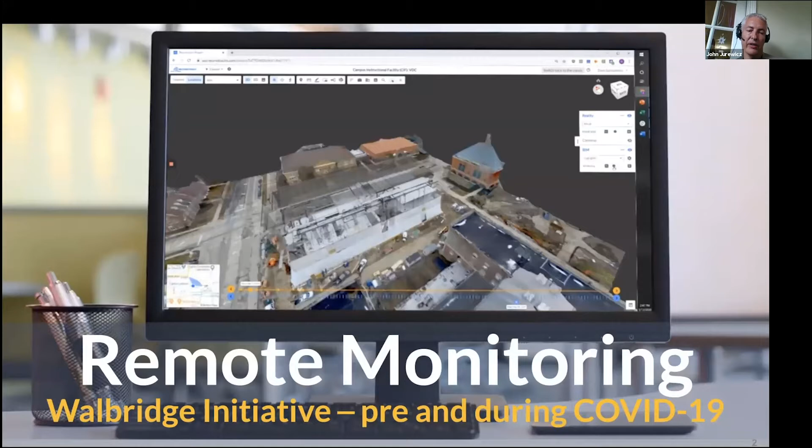John? Yeah, our problem kind of arose out of starting a group that had done laser scanning. So we were doing phase-based laser scanning, and we were turning the data around after registering in roughly a week to 2 weeks' time. And it just wasn't fast enough to be useful to the guys in the field. They also wanted to go forward and backward in time and see what had happened last time we shot versus what's coming at us and do this quicker, faster overlay with modeling. And we struggled in trying to do that with conventional tools.

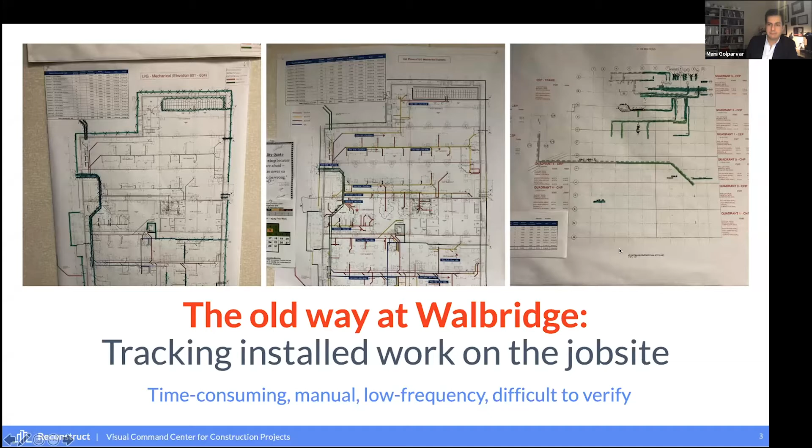Here we go. We can look at the next slide where this was our old way of working. And when I say old way, it was really just prior to learning the new overlay methods. In this case, we had two-dimensional drawings that were sliced out of a large model. And it was very complicated. We had a lot of error in documenting progress of work put in place, like pipe installation, and there were also discrepancies. We oftentimes were marking up systems that had yet to be installed incorrectly off of a 2D plan. So this was difficult for us and inconsistent.

The new way is much more precise and much faster. You've got an overlay of underground piping. You can see what it looked like before you backfilled. You can then overlay that with the new design and new systems that are coming. The sequencing is much more real, much more apparent, and again, that speed of looking at it and being able to review this on a tablet out in the field is just incredible. Very helpful.

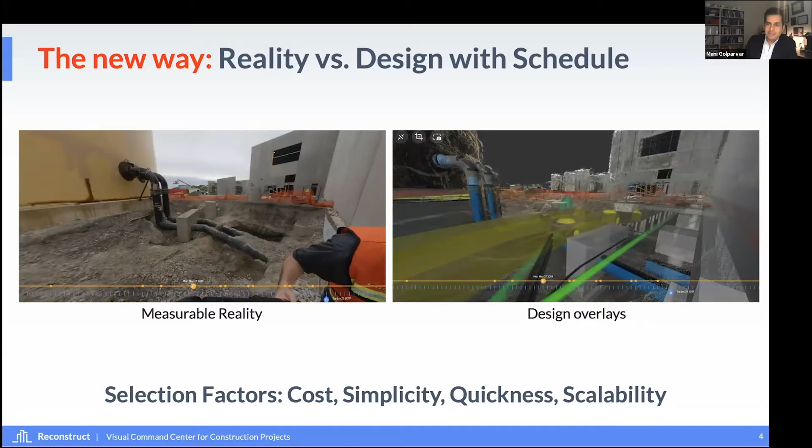I learned about this initiative that John had about remote monitoring almost 3 years ago, way before this pandemic happened. And this resonated with our own experience at Reconstruct pretty well. I used to work for a top 10 ENR construction company. In our projects, which used to be around 1,500 projects a year, we had 1 or 2 field engineers sitting in every trailer analyzing daily reports. When you open up these daily reports, you would see that there's not a whole lot of information really being captured on the job site.

But really the intent is to make sure subs, owner, contractors, everybody really understands how much work gets done. And it's part of our owner requirement, right? We have to submit weekly reports in terms of how much work gets done. We never trust this information, not only at the project level, but at the entire regional level. So what we do in every single project is we ask every contractor to stand up and color code 2D drawings for a construction management firm project, which is very similar to the projects that John was referring to. What we really wanted to do was to use this feedback to update our schedule.

But as that picture from one of the projects I actually used to work on myself shows, you can clearly see that the P6 schedule happens to be on this corner of the wall, and color coding and the feedback in terms of how much work gets done is being documented in a 2D drawing. So oftentimes people who were removed from the site were missing this feedback of how much work gets done in the job, so we can use that information to take control actions.

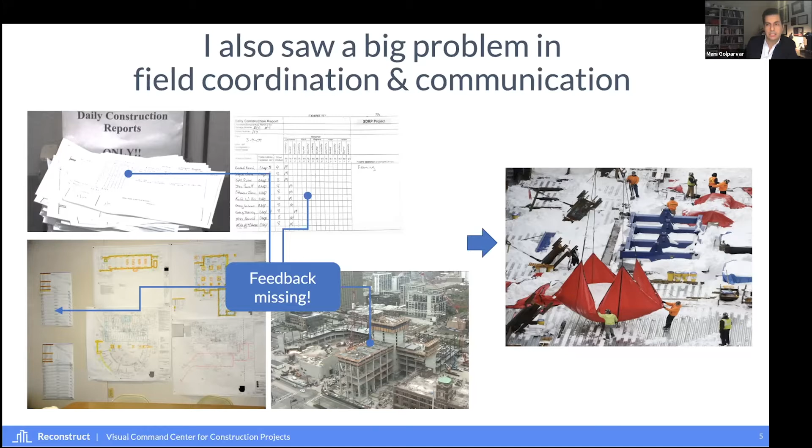This doesn't only apply to one company or two. This is at the entire industry level, where these issues with coordination and communication and what happens in the field and making sure all the stakeholders are on the same page are leading to cost overruns and project delays that we've seen ENR, Dodge, and McKinsey reporting on. The way we wanted to solve this problem was really to tap into the most simple form of communication.

If you talk to owners, if you talk to subs, every contractor who's on the job site, if you show them a picture, they would understand immediately what needs to be done and how much work has been done. Images and videos are really that single source of truth that we can use to communicate what needs to be done in the job, and even use that as a feedback to the schedule to make sure the basis of the schedule is being updated.

But there are all kinds of visual data. Sometimes we walk around and take pictures with cell phones. Sometimes we use professional photography services. Sometimes we rely on time-lapse photography. Application of video cameras indoors are extremely popular, especially with 360 cameras. For the past 5 years, we've seen a surge of drones in construction to the degree that now the construction industry is the #1 market for drones as a hardware platform. And as John pointed out, laser scanning.

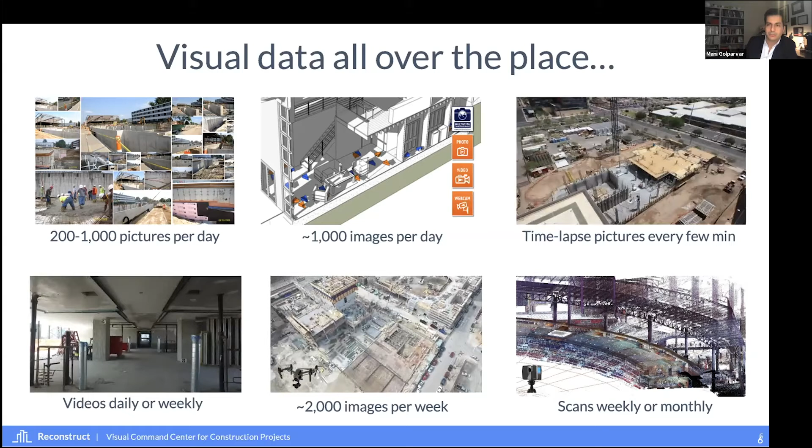We wanted to see if we can tap into all kinds of visual data, but as you can imagine, none of them were really organized in any form or shape, let alone providing that feedback that we desired to improve the basis of coordination and communication. So we brought this concept up to John. He actually shared with us a very similar story at Walbridge.

John? Yeah, we had spent time laser scanning, like you see in the upper left there, with a phase-based laser scanner. It was taking us time, and you had to register it. And also we often would get damages done to our scanners. I had the experience firsthand with having a scanner get knocked over in Mexico. And there's also the problem in a steam tunnel with fogging up. And so we had lots of different issues with expensive equipment.

And then with drones, it's difficult to fly indoors, and the battery life doesn't really last that long. And there's all kinds of permissions, and some clients just don't allow drones to be flown for other reasons, industrial espionage being one of them. So we were really attracted to this idea of just walking around with a handheld camera where you could really get into an issue quickly.

And we've perfected that. We have a users group where we work hard on these 360 images, trying to always improve the lighting and the way it's captured, and work closely with the Reconstruct staff to make sure we're really getting comprehensive captures going on. Thanks, John. As you can all see, there are all kinds of reality capture solutions, and there's really not one that would fit all job sites.

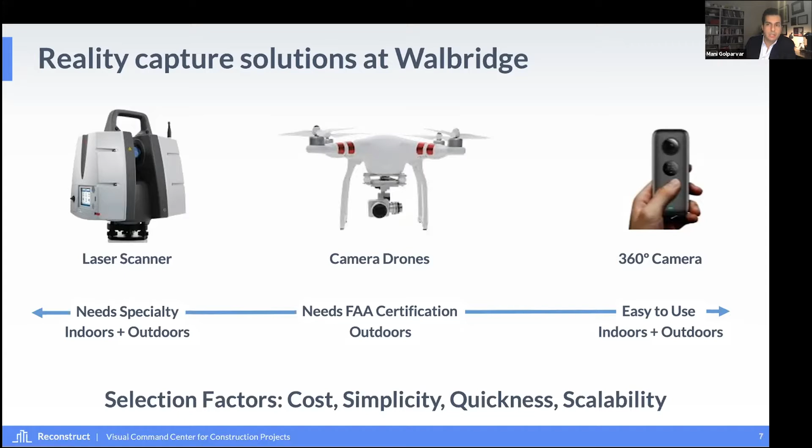So what we really wanted to do at Reconstruct is to offer a solution that is agnostic to hardware, and it can work with any type of device and make sure it brings that wealth of information as a feedback to the schedule. So with that, we've been offering a remote monitoring solution for almost 5 years now, where we integrate with a number of platforms from Aconex, BIM 360, Procore to bring existing project data into our platform.

What that means is your images and videos you're capturing with drones, 360, cell phone devices, through the photogrammetry engine that we have at Reconstruct, can automatically transform into a measurable street view experience. An experience that would give you that time machine for construction, that at any point in time, you can see what's happening, you can measure that, and use that for documentation and coordination.

The second aspect of our system, and the second workflow that we support, has to do with quality control. What that means is we bring in 62 different file formats of design, 2D or 3D, or the hybrid of the two. So now you can see what is there versus what should be there on the job site. And if you map that out in the context of a schedule, for which we have bidirectional integration with P6, Microsoft Project, or it can be as simple as an Excel spreadsheet that you can import into our system, you can see what is there versus what should be there in the context of a schedule.

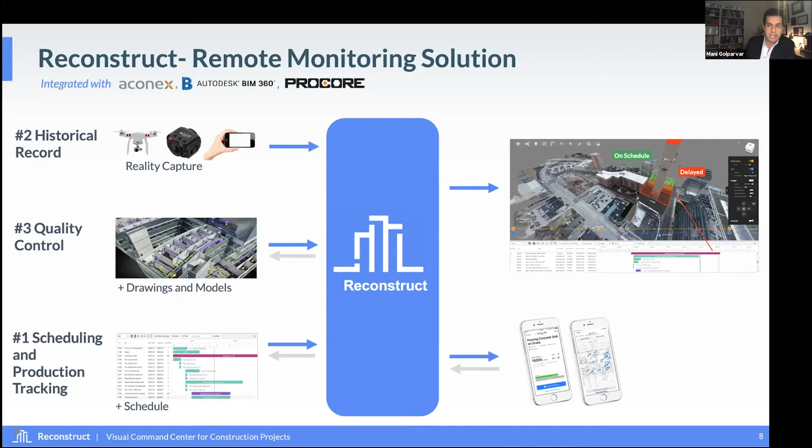This information is entirely web-based and accessible through mobile phones. What that means is if you are completely remote, you can log into the system and immediately see what are the locations, tasks, work packages that are on the schedule, and what are the things that are behind the schedule.

Our system learns the pattern of production on the job site, and as we contrast what is there versus what should be there, we can use that information to forecast the future. So we can always highlight indoors and outdoors what are the locations that are at risk for potential delays. So when teams are going to a coordination meeting, instead of reacting to what has happened over the past few weeks, they can plan ahead of time to head off potential delays from happening.

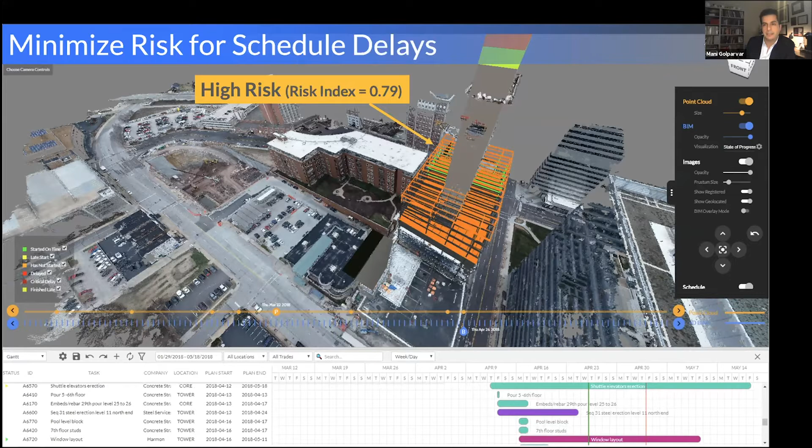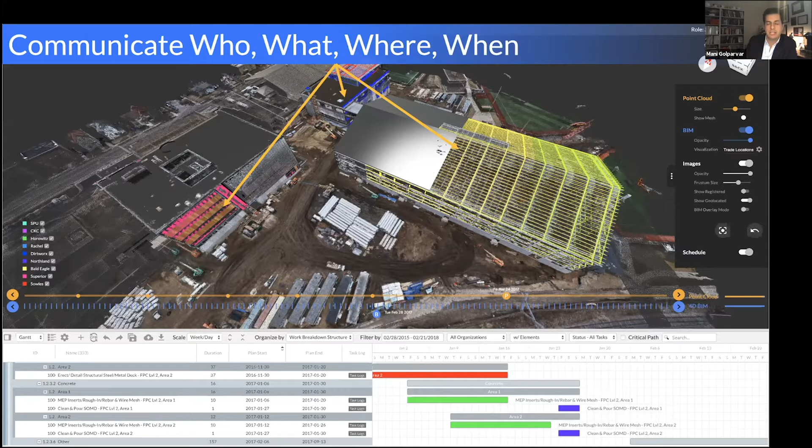And really the last visual is something we use every day on every job site, where we want to make sure that we can communicate who does what work in which location. We leverage the power of the models and the data behind them, tapping into the schedule so we can plan out the total quantity of work expected, all mapped into the context of what the photogrammetry engine provides us, which is the reality on the job site. So you can focus on coordinating and communicating with the most up-to-date information, whether that's reality data, design information, or schedule.

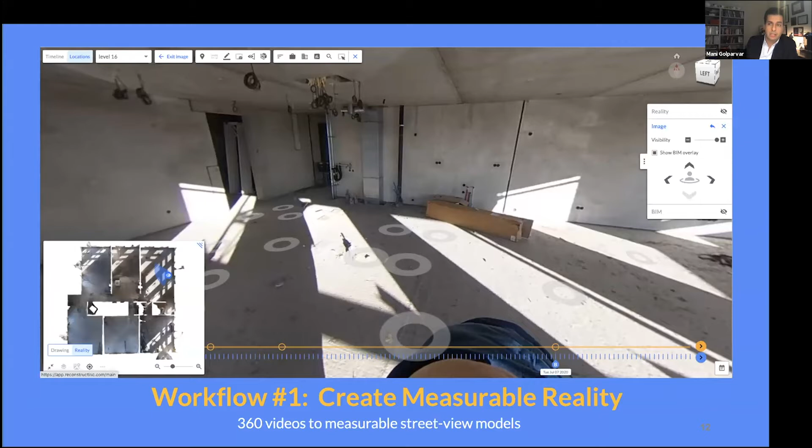So with that in mind, John and I are going to present three different workflows. The first is visual documentation, getting started by bringing in your images and videos and generating measurable street view experiences. We've shown examples of drones and laser scanning, and I'm sure many in the audience have seen those. So we felt like we could focus on what's been specific to the Walbridge initiative and one of the novelties we have at Reconstruct, which is tapping into 360 cameras.

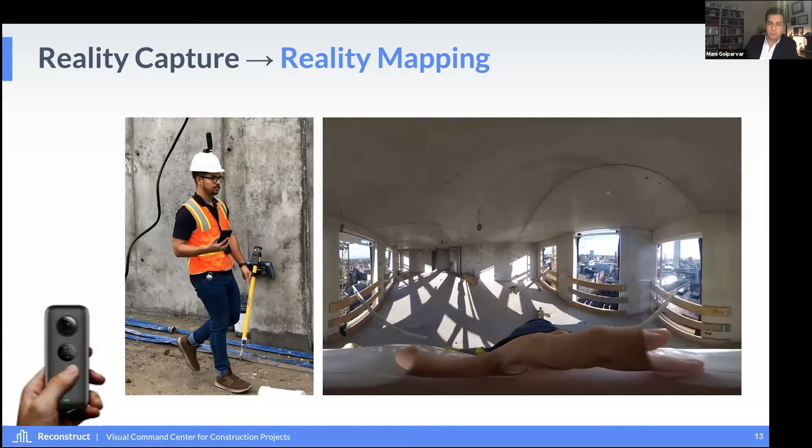These cameras are extremely popular, probably the number one modality of capture in Reconstruct. What that means is you can simply turn them on, put them into video capture mode, and just walk around your work location without doing anything else on your phone. Reconstruct can automatically transform these videos into measurable 3D models.

What you'd see is a picture extracted from a video frame, which is measurable with donuts on the ground that help you navigate to other frames of the video. On the lower left corner of the viewer, you'd also see a navigation map, a 2D floor plan, automatically generated from the video. Our engine, regardless of whether you've used Garmin, Insta, Ricoh, or any other 360 camera, can automatically give you this experience, because even from 360 videos we have the ability to generate point cloud models.

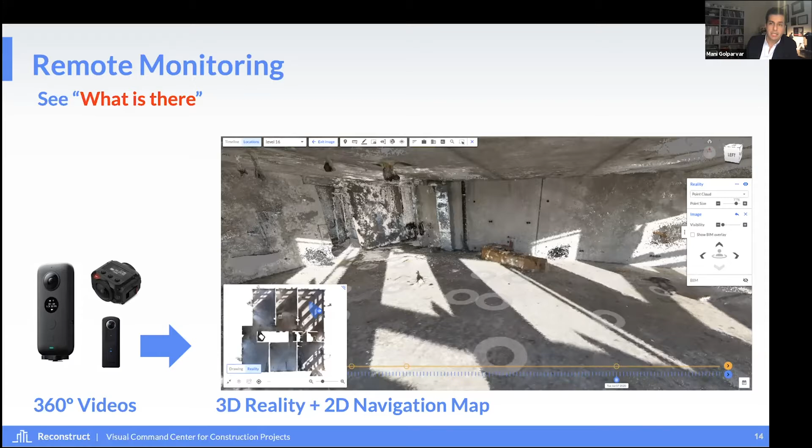And we do that over a project timeline. So as you create a reality capture, you can always contrast that against design, whether that's your IFC file, Navisworks file, Revit, or a federation of all of them. So you can contrast what is there versus what should be there.

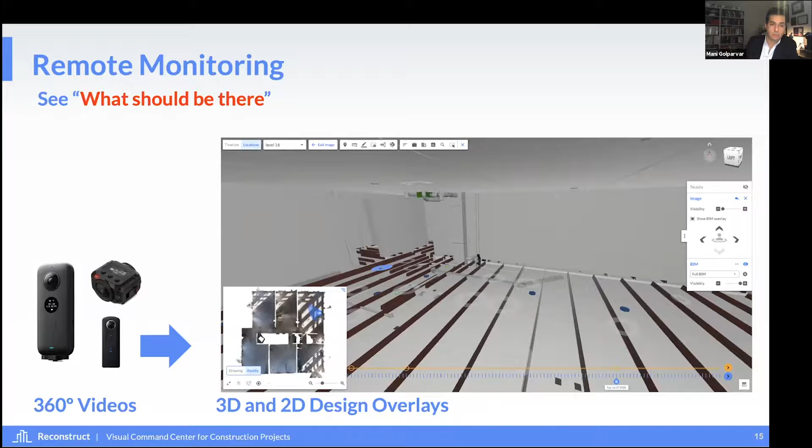Here's how that experience would look like. For every location, you'd be sitting at your home office, like many of us are doing right now, and we can log into the project level 16, and start clicking around on these donuts on the ground, going from one frame to the other.

As we make these transitions, you can clearly see this street view experience where in the back of the scene there's a point cloud. Every image you're looking at is measurable. That means now, indoors and outdoors, every frame gives you the ability to measure angles, distance, areas, volumes, and track them over time.

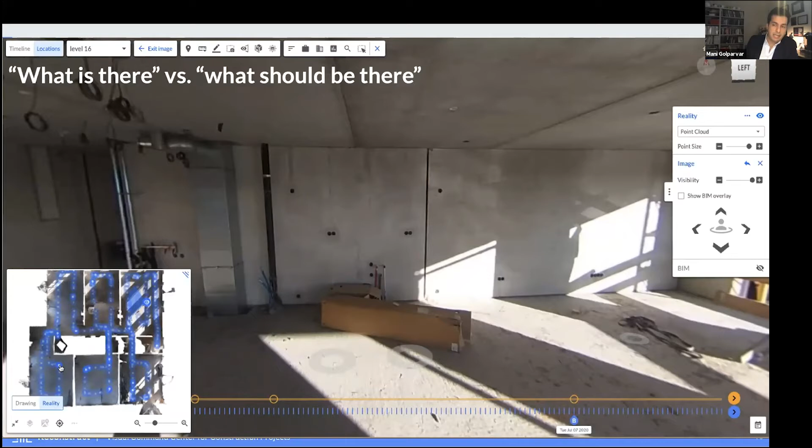This can be done with laser scanning point cloud you import, with drone data, or with the 360 video you see here. For the floor plan, you see the ortho photo that's automatically generated, and you can use that to guide where you are, or even download it for your tenant improvement or design needs.

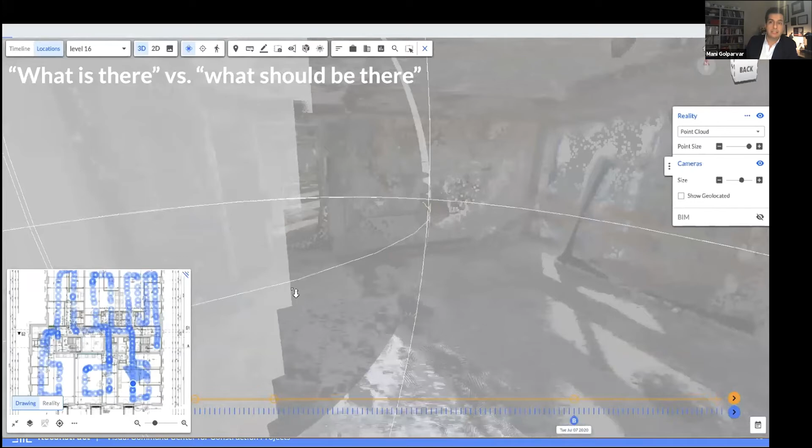You can clearly see the frames are mapped. If you bring in your 2D design information, you can also map the reality against that design, so your navigation can be done against a design floor plan, or switch back and forth between 2D and 3D. As much as everything I've shown you is 3D, there's a 2D aspect to the system, so you can run this entirely in 2D.

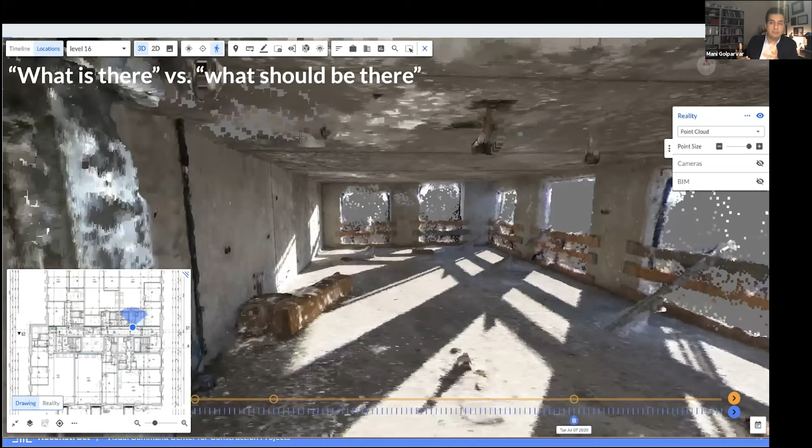Here, just showing you a quick walkthrough from the point cloud perspective, so you can see even from one video capture for a few minutes, there's a very compelling point cloud that can be generated. You can switch to a 2D viewer, where you can see the design information against the reality. This is also great because you can create your issues in 2D and make sure those who want to interact with the system from a 3D perspective can go back and forth and see what really happens.

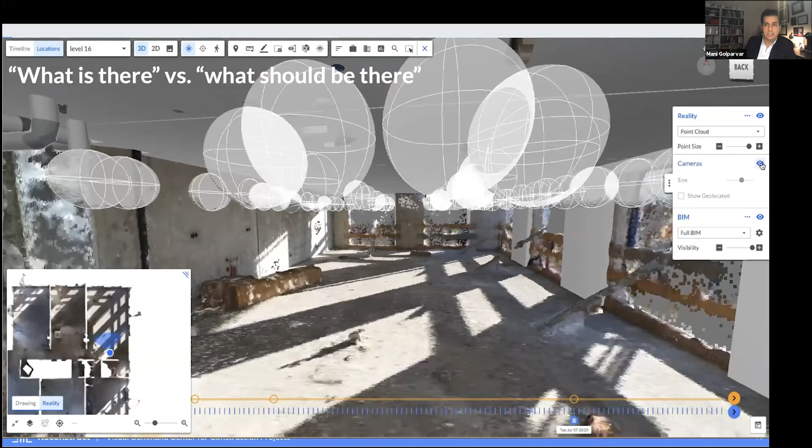Everything in this system is organized around location, so you can go from one location at a time, or go back and forth and do this sort of time machine for construction. Design information can be overlaid on top in 3D or 2D. I showed you the 2D a moment ago. Now we are heading back to one of our images.

If you go to the image, you can immediately interact with it, measure it, or do a BIM overlay on top as opposed to side by side. What that means is you can exactly see what is there versus what should be there.

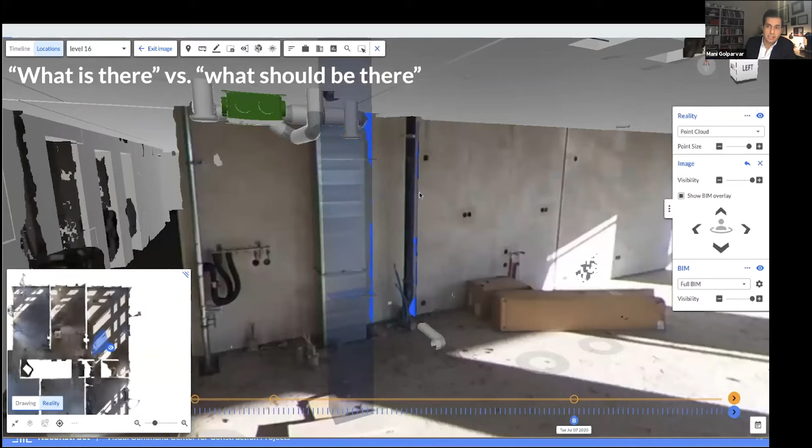The system is entirely interactive, so you can extract, focus, and isolate components, get access to metadata that you've provided in the design, so it immediately becomes useful for quality control. That means you can hide and play with the transparency in a form of augmented reality, and now measure the delta between design and reality.

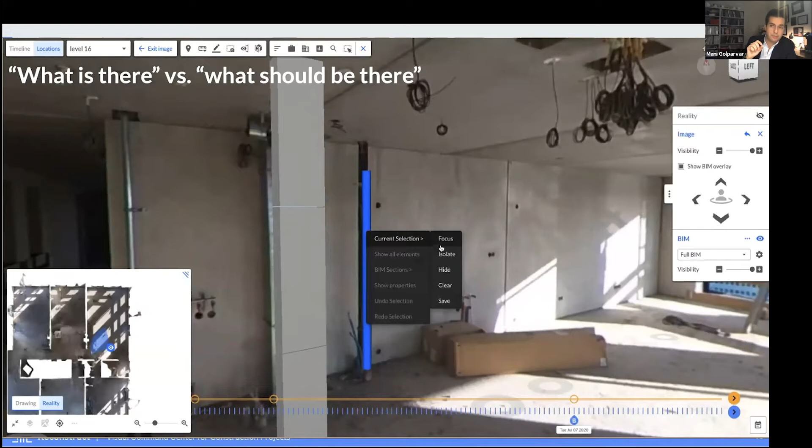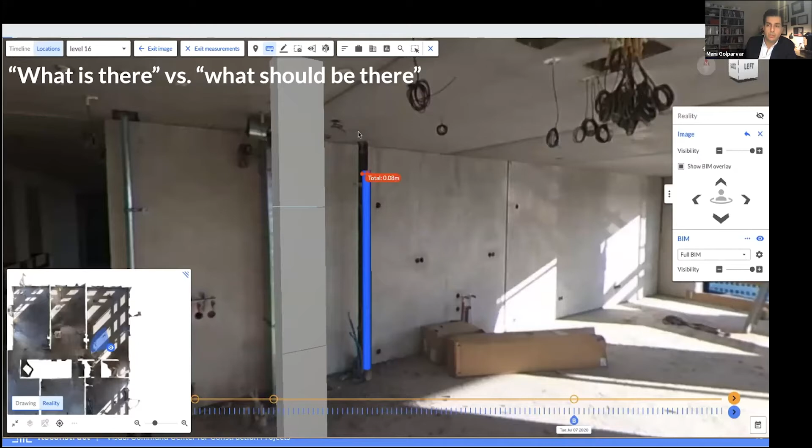In a moment, I'm going to pull up my measurement tool here after showing you the properties panel, and we can find the delta you see between design and reality. Our measurement is enabled both from a design perspective and also from a reality perspective. Obviously this can be documented as an issue, or sent as a text message to anyone in the field so they can immediately address the issue at hand.

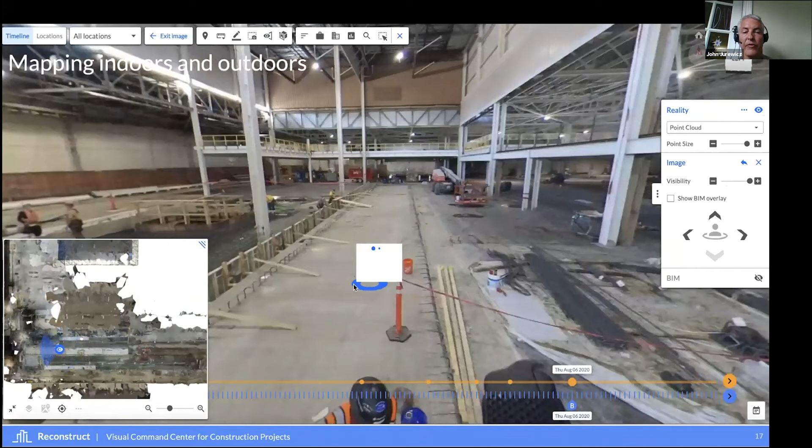So with that in mind, we started deploying this with John, and this is one of John's projects. John: Yeah, this is a current factory where we're trying to make America great again by gutting a building and converting this into an electrification truck facility.

Here we had to raise the roof, renovate existing structure, and a lot of the old design drawings didn't really match what was out in the field in terms of bracing and connections. So some of the features that Mani just showed you became really important to us, testing this out in the field.

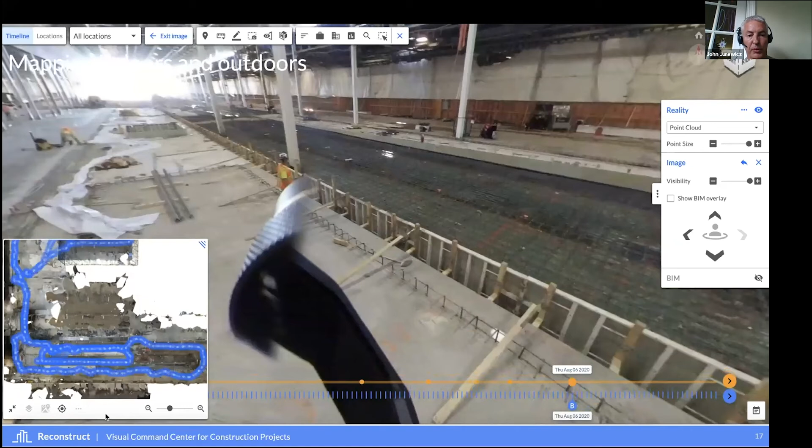And looking at column connections to bridge girts, moment resisting connections, also documentation prior to slab pour, so we could see where the rebar was placed and how dense it would be if we're going to core at a later date. All these things became much more useful to us, because we could measure forward and back in time.

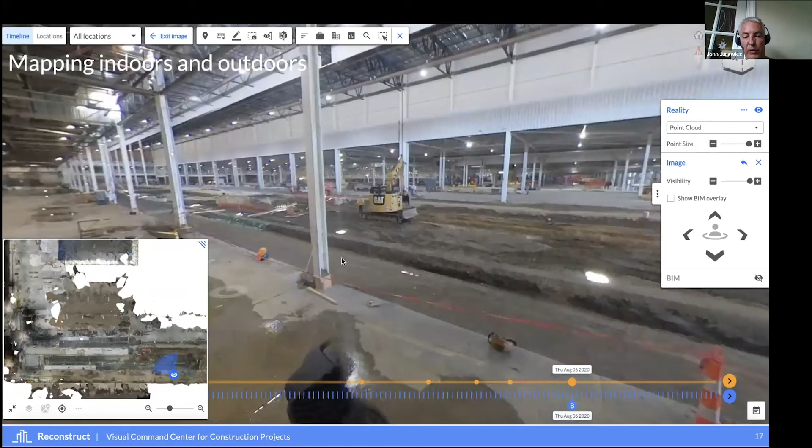So a superintendent who showed up midway through the project could come on here, and one of the first things he did was look prior to the slab pour to see how densely the rebar was placed, to see if we could core these slabs in the future.

So it becomes really useful in photogrammetry to be able to go forward and backward in time. I wanted to also show you an example of drone imagery where we captured a large facility, and you can see the resolution is higher. We're learning that this can be used not just for claims, like for dewatering in this case, but also for placement and cleanup of site.

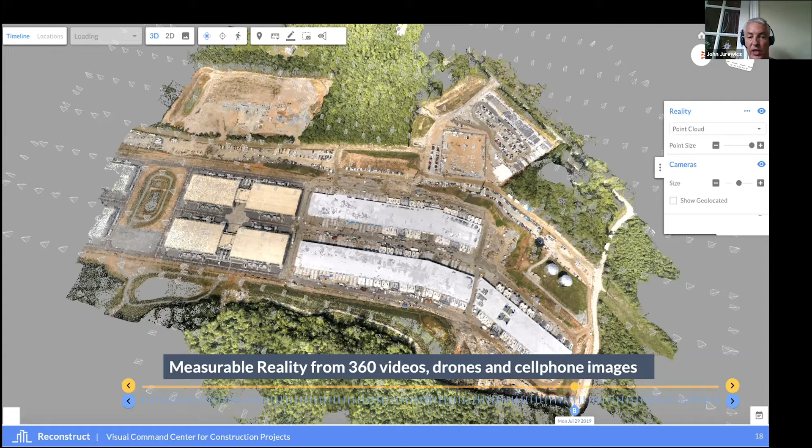Is the site ready to receive—in this case it was a data center, we had a lot of large engine generators to be placed—and the suppliers, being able to see this online, had a lot more confidence that we were ready for them. They could deliver or expedite even deliveries and kind of crush the schedule and make it go even faster. And that's what this is all about, this need for speed.

So what we're learning is the historical record is very useful for people being shifted from one site to another. Being able to measure not just in 3D, but in 2D, especially on a large factory where it's confusing and awkward to look at everything in 3D right away.

A lot of times the column lines and getting familiar with things in 2D are where the superintendents like to start, so they have a base point and can become confident in what they're looking at. And then we also use it as a basis for future phasing, doing quality control, and managing the uncertainty in our current situation where not everybody can be on site.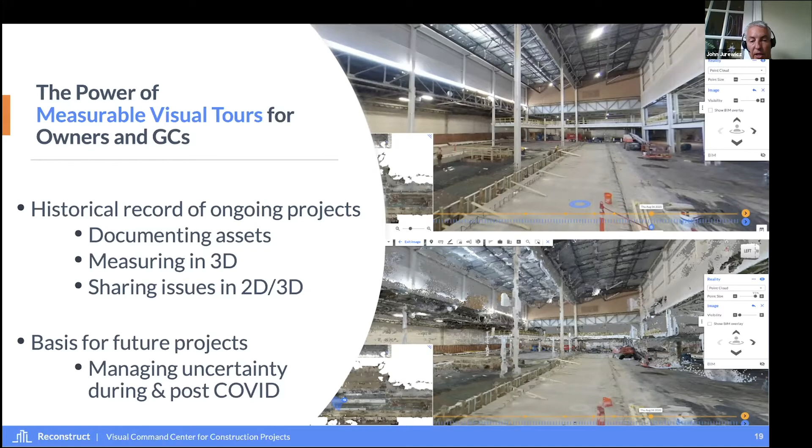And this really ties that communication between the office and the field, especially when the office is remote and disparate in all these different locations. They really feel like they're part of the team because they can do these virtual tours.

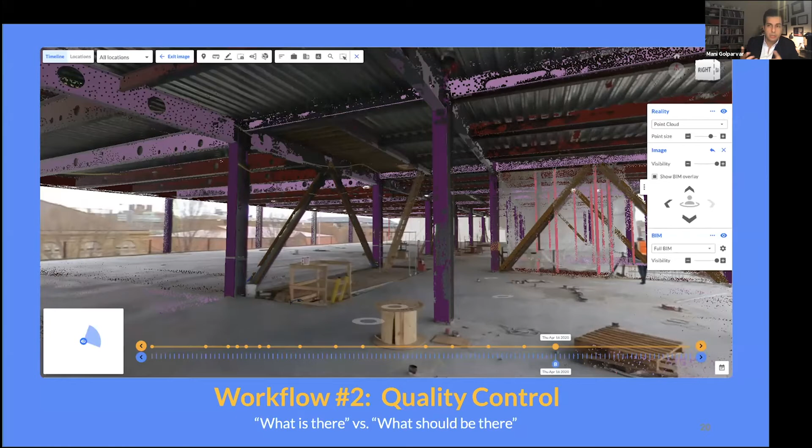Thank you, John. So as you've seen, the second workflow that we support has to do with quality control. That's when we bring in the design so we can visualize what is there versus what should be there. And to John's point, this can be done completely in 2D, completely in 3D, or a hybrid of the two, where people who want to interact with 3D can use that mode, and your superintendents and foremen can start interacting with the 2D data.

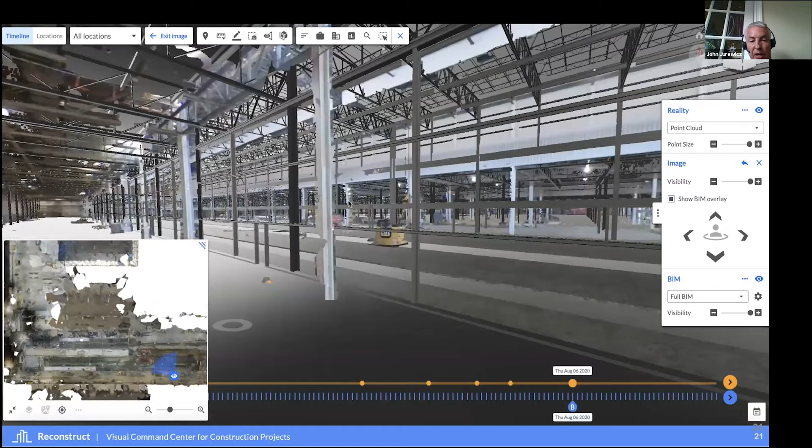We found this really useful. On the bottom left, you can see those blue circles where the actual captures in the video were taken. And you can see that blue area with a little angle showing which way you're looking, giving you that orientation right away. This helps you, especially in a large factory, know where you are, especially if column lines are marked in the model, which we encourage, though sometimes they're not. This helps you get oriented and see where you've got to go to mark and pin issues.

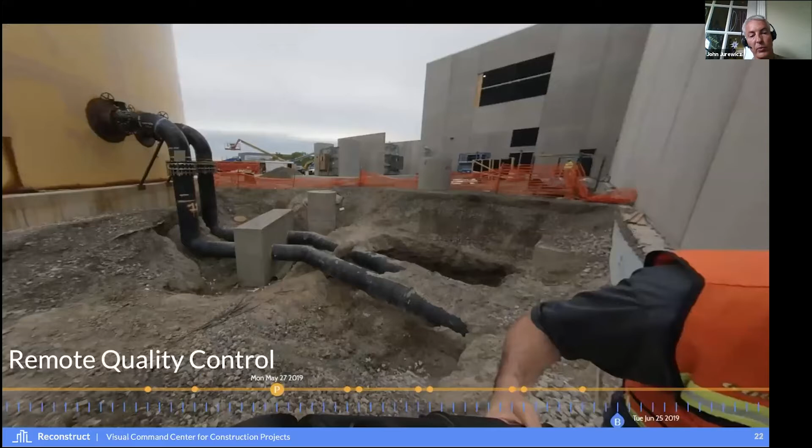We also like this feature of looking at reality versus design. In this case, we had pour blocks - large pour blocks that restrain the weight from all that water flowing through those pipes. In the field, the guys are smart and they know what they can form, and often adjust these pour blocks to be practical, so it really resists the thrust that could happen through the pipe.

When they adjust or fine-tune these things, it's nice from Reconstruct's point of view because we can see, even with a tablet out in the field, what other systems it affects when we adjust this pour block. In this case, you can see an overlay of yellow, which was an easement for all these new lines coming in. The green lines show new storm and power coming in. We've got a number of very complex utility systems being installed.

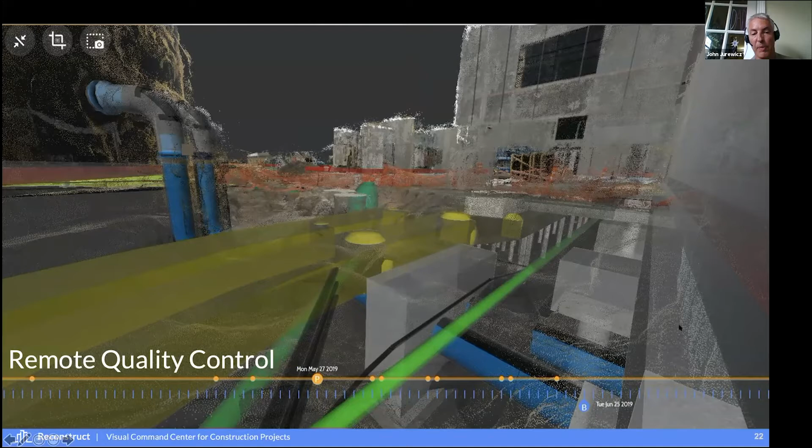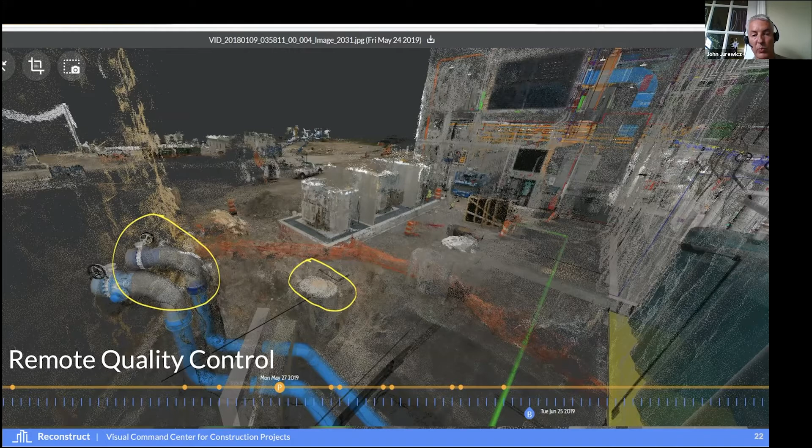What do those adjustments mean, and what's our leeway in adjusting? The yellow circles indicate access to valves. On the right, that circle indicates conduit being fed in a later phase, coming over top of that pour block. So you could see that they knew they could bury the pour block low enough so that conduit could make it in and out of that vault. Slowly, little things like that really add a lot of value to the tool in knowing how to do coordination in a much more meaningful way.

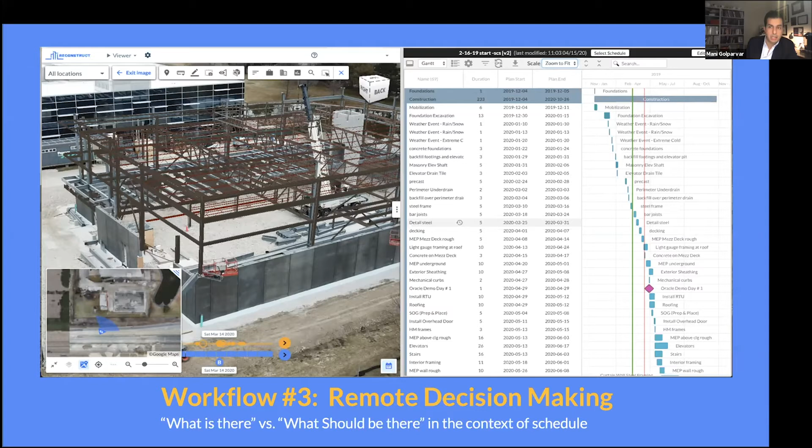So the last workflow that the remote progress monitoring platform supports is making decisions in the context of the schedule. If you can visualize what is there versus what should be there, beyond quality control, it can provide the basis for how we change the sequence of activities, who goes first, what is the right set of trade locations we can envision for the project to keep it on the milestones we've communicated and agreed upon.

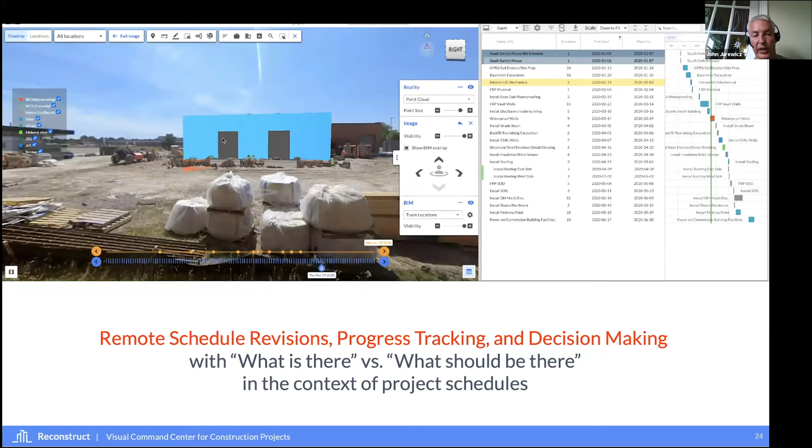We built this switch yard, and we knew it was going to shut down during COVID because we had a delay. When the delay occurred, we were able to visually show the owner what's happening and what it means when we have things still arriving on site, like in the foreground here, these packaged elements. The owner had a lot of confidence when he could tell us to start back up again, because he's visually seeing things get delivered and we're ready to go, keeping the site clean. So even though we had this delay, this was very useful to us.

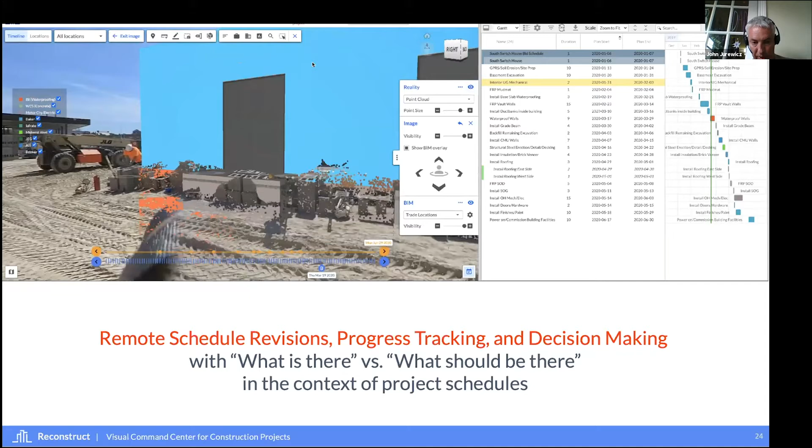And you can see the timeline and the adjustment - everything's documented in terms of the delay. It was very, very transparent. We found a lot of usefulness in this for this small switchyard project.

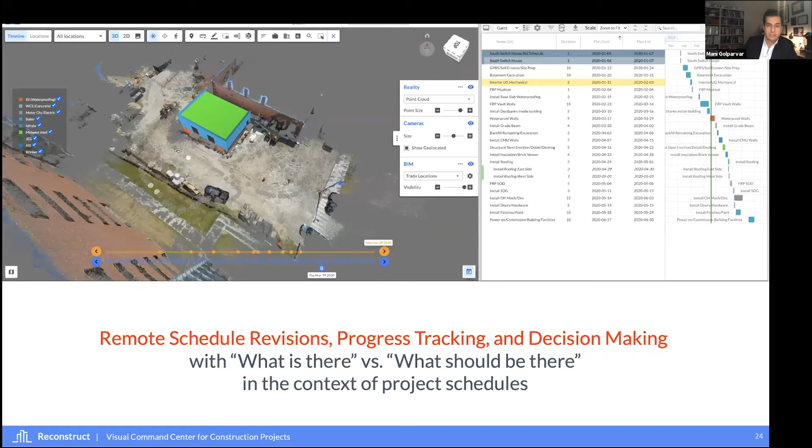As you can see, schedule can be tied to the visual data, can be tied to the design data, and it can be done at any granularity. This can be done at a master schedule level, or it can be purely your look-ahead plan, or a hybrid of the two. So again, you can roll up and down and use that for part of your decision making.

In this case, we've got a tablet. We installed piping that went in the ground, feeding in and out of this energy plant. The owner had subsequent trades that were going to follow us, so we could get them oriented by bringing them on a site tour and showing them with the tablet - not wearing a very expensive augmented reality headset, but a poor man's AR where you could see your positioning exactly where pipes were underground. They found that extremely useful, and it built a lot of confidence in where they were going to go with their sequencing of future pipe installations underground and above ground.

So let's talk about the return on this. Early in the presentation, we told you how much time we took to really scan. And so we documented a full-time person scanning and how long it takes versus doing photogrammetry solutions, which you can see are 1/6 of the time. But the real benefit is when you start looking at the processing, the manual work to process.

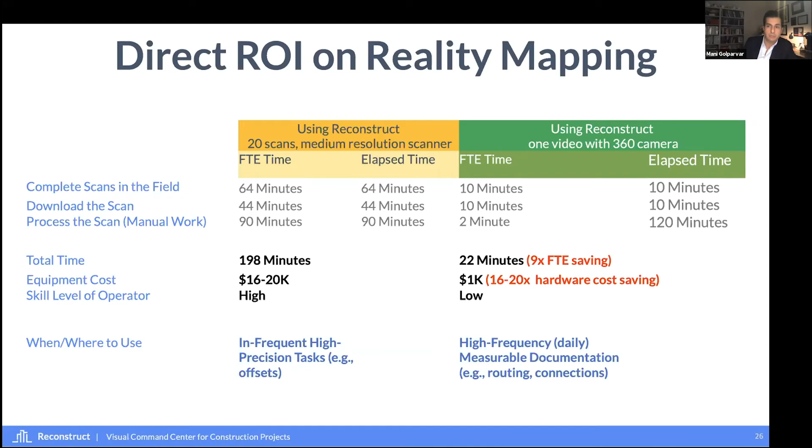And as John pointed out, and we mentioned before, there's really not one solution that will fit all job sites. We've always been of the same philosophy that if you have scanning, you probably want to use that for flatness, plumbness measurement, and things that require high precision measurement. And you can import that into Reconstruct. If you want to do high frequency documentation in a form that is measurable, you can also do that with Reconstruct in combination with 360. So you can bring the best of the two worlds together to support various workflows that you have in mind.

Yeah, so all there is to it is to tap into your existing visual data and bring that into a form that is measurable against the design, so you can make your decisions remotely for quality, for progress, understand risk, and manage your projects. So with that, hopefully we've shown you some of the ways by which photogrammetry is adding value to how we're coordinating and communicating what work gets done in the field, and how we can use that data to measure progress and risk. Any questions?